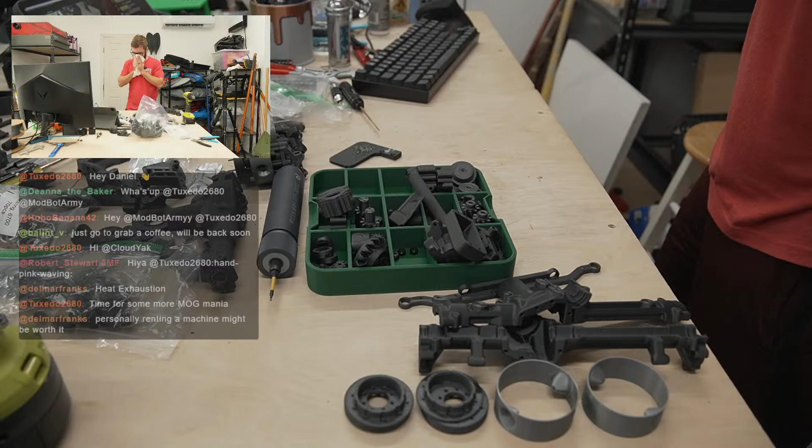I really wanted to rent a trencher, Delmar, but I don't think I had the space for it. It's not a huge run—I haven't measured it because it kind of curves really weird, but between the shed and this concrete slab is like max 3 feet width, which might be enough, but I don't know. A pick would help if you want to do it by hand.

That's what my dad said, to get a pick. I do need to run some sprinkler wire, which doesn't need to go as deep, but for the electrical work to the shed, I basically have to dig down 14 inches, for code, inside the metal conduit. The top of the conduit has to be 12 inches below grade. So most of it is somewhere between like 13 and 16 inches. I'm not consistently measuring, but it's just not fun.

Home Depot runs small trenchers. Yeah, well, in hindsight, I probably should have done that, but I'm so far, I'm like 80% done. I think I have a photo, I'll show you guys kind of what I've been doing. Gosh, and I'm sorry in advance, my allergies, there's just not much I can do. I took an allergy pill, I've been blowing my nose.

Yeah, so it's right up against, I don't know if we have autofocus on—yeah, we do. So it's right up against the house, and I've just been hitting all sorts of rock and concrete. It's just not fun. Thankfully it's not a massive distance. The shed is 10 feet, so the run is probably like 16, 20, maybe 20 to 25 feet. But it just sucks, it's just not fun at all.

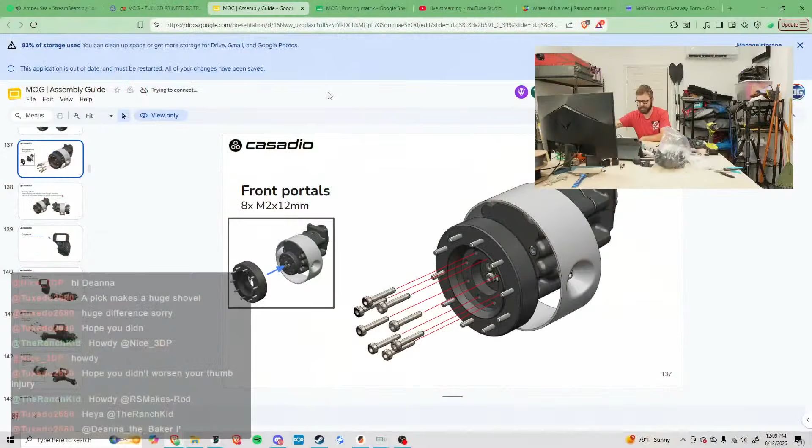Steve Builds left you to come to Portland? Yes, he ate your bagels? Oh I'm jealous, eclipses are really fun. Yeah, I saw your photo, it looks awesome. I'm jealous that he got to try your bagels.

Okay, so this is not the right piece. Yeah, I've organized everything so we've got that. I knew that Steve was gonna try to hit up Mandic to do a stream, but I didn't talk to Steve over the last probably day and a half. I checked in with him just to see how Phoenix was going, but I didn't realize. I texted him today and was like, hey dude, how did everything go, did you make it home?

He said he got to visit Mandic, and they streamed for like 5 hours yesterday. I just caught a little bit of the stream right now. I was watching, they installed I think it's a filter, for the Core 1, it said it was an LDO kit thing. So I guess it's not an official Prusa thing, maybe it's a community mod. I kind of skimmed through the stream.

For anyone joining in, sorry in advance, my allergies are just rocking me today. The fires have been crazy, so air quality is horrible, and then trenching has had all sorts of dirt. I'm changing the f-stop on my camera, it looks like I'm definitely overexposed. There we go, the color looks a little less like I'm in a photo booth. All right, blow my nose yet again.

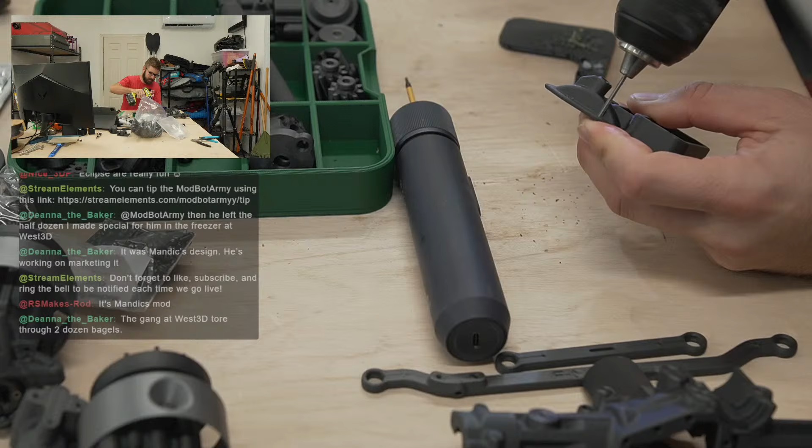Okay, I'm pretty sure I've gone through all of them at this point. Yeah, that's awesome.

Right, so we've got this guy, and it needs to go like this. Zoom out a little bit. And then this is going like this. Okay, it doesn't seem like it's causing any binding issues.

And we need M2x8s, lots and lots of M2x8s. M210s, M212s, M2x8s. We need 8 of them. 2, 3, 4, 5, 6, 7.

So we mentioned last week that Steve and I are starting the Antithesis Aether build, that's how you say it. I think our original plan was maybe to start it not next Wednesday, but like the next Sunday, so not this Sunday, but the following one. But I'm not sure if that is going to happen. We are waiting for some parts, basically waiting for some parts from PCBWay, and then I am waiting on a few other pieces. So I'm just not sure if they are going to be here in time. I haven't even talked to Steve really about it, so I don't know, Steve will probably pop in chat and I'll tell him. I know Steve's got some traveling too, so we'll see. We're definitely doing the build for sure, I just don't know what the starting date's going to be yet, based off of Steve's availability and then when we actually get the rest of the pieces we need in.

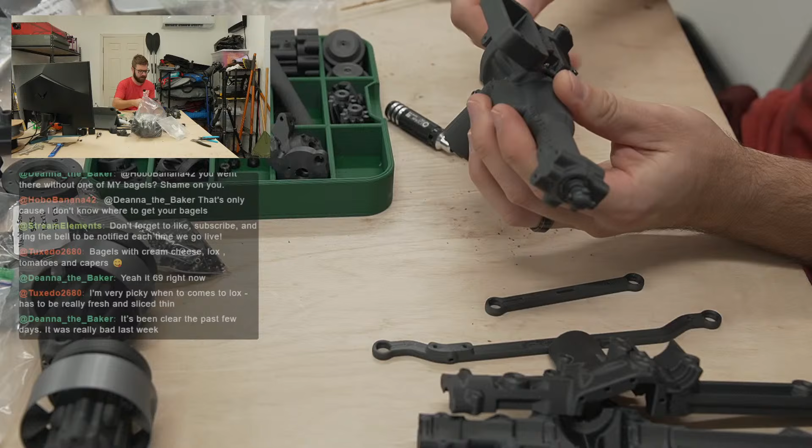Nothing is binding, we're still spinning freely, so not too smoky.

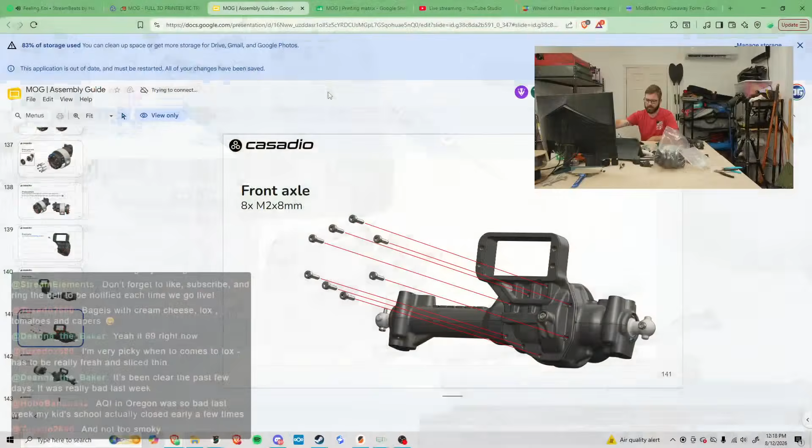AQI in Oregon was so bad last week, my kids' schools were actually closed. What did it get up to? We've been between 100 and 200 for weeks, and then we had a few days over 200, and a few days over 300, with a ranking for the 3rd worst air quality in the country for a day or two. But today, I looked and it shows 75. Yesterday Aaron took the kids out because Jack especially needed to go out, he's just got too much energy to be cooped up. So it definitely seems like it's progressing in a positive way.

Okay, apply some grease here. So we are connecting this side with, let's see, is it this one? That doesn't seem right, is it this one? Why is this? Oh, I'm holding it incorrectly, that's why. I think it is this guy. Yes.

Are we sure? This doesn't seem to... oh okay, here we go. Okay. So I think this guy, if I'm looking at this correctly, this seems like the correct orientation. But it does say we want to apply grease, looks like inside of this joint. So let's, oh, great.

Okay. I don't, where is it going? There we go. Okay, that feels like a lot of grease. Let me go ahead and sort of... where's our little flathead? There we go. Tiny little flathead from last week.

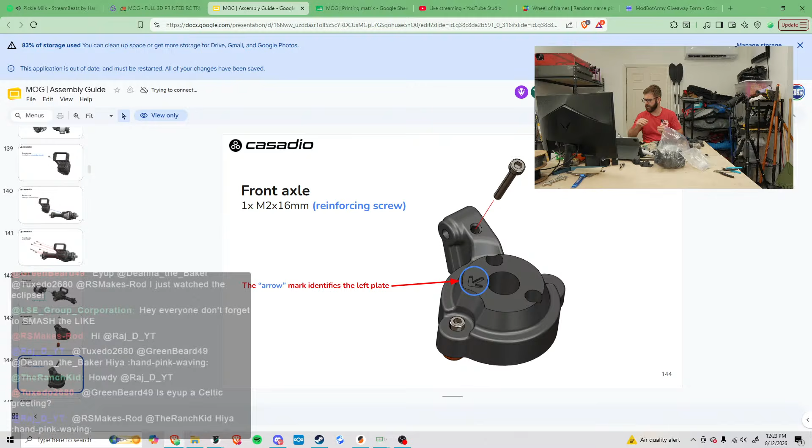Okay, grease this up. How is your dragster going, Delmar? Okay, so this is going at an angle.

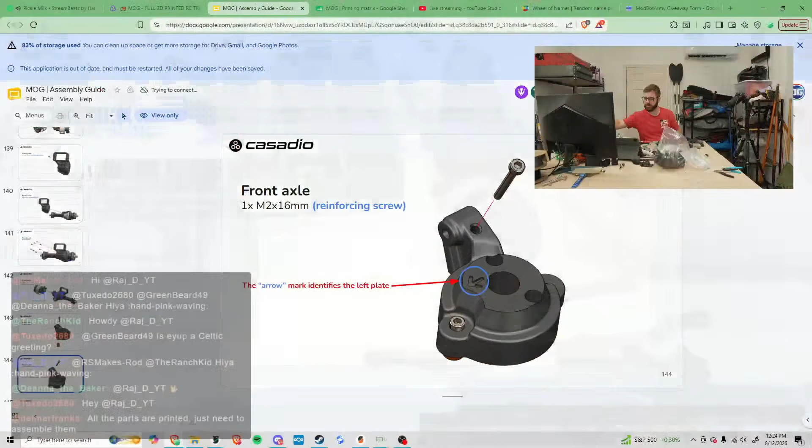Seems correct. Now this says to apply some grease here. Okay, grease in that hole.

I've got so much grease on the outside of this little packet, let me just put some on this flathead. Let's see if I can shove it down in here. Need a little bit more. Lots of heat sets, all the parts are printed, just need to assemble them nicely. Okay, that feels like it's probably plenty of grease.

Now it wants us to install this. Pretty tight. No, it's not too bad actually at all. You can definitely pivot, but it wants to pop out though. Okay.

Probably need to drill. Yeah, I need to drill through this actually. So let's take this out and drill. Not drill, but god.

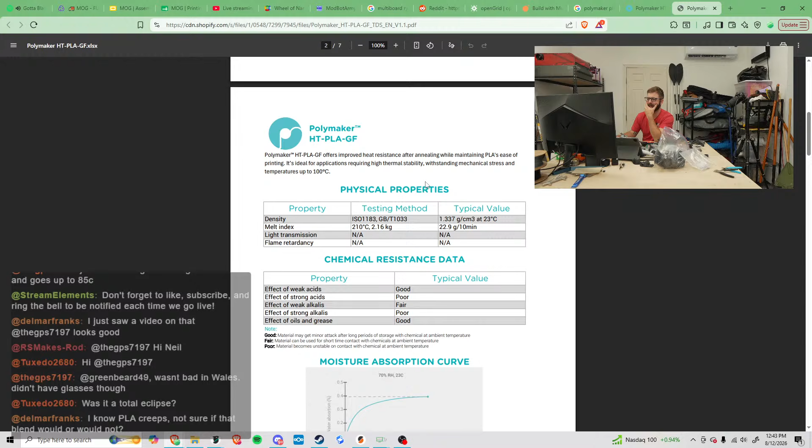But because it's PLA, I remember it withstands up to 150 C. Yeah, I think that's the Vicat softening temperature if I remember. I don't think that the actual... did they say, let's see - chemical, I don't care about, dimensional thermal properties. Yeah, so the Vicat softening temperature is 150 Celsius, but the HDT is only 60 Celsius.

So the Vicat softening temperature is probably not important at all to me, considering the load of the tool being held by those things. I don't think this material is going to work for what I need in that shed. I have concerns that during summertime when it's at its max heat, the weight of like a saw could potentially cause it to fall.

If I annealed it, then I'd have no concerns. Like, what is - hold on. 140 Fahrenheit is pretty dang hot though. It could be fine, and that's under 1.8 megapascals, and if we go to 0.45 megapascals, I don't know. I just don't know if I want to risk it.

The tools are just not super light, especially if I'm putting up - I've got one of their brad nailers, and a jigsaw, a couple, like a circular saw, a bunch of drills and stuff. I just don't know.

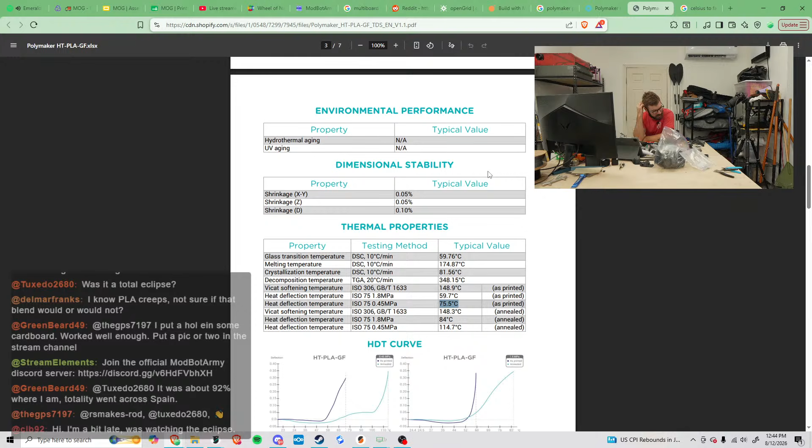I don't know, I really would like to because of the color. I really wish they made that green for their PETG, and I wonder what the closest would be if I go to - it's PET. Yeah, that green's not even close, that's just black. If I want that green, I have to do that. I just don't want to have to anneal every part, that seems rough.

Well, it's the color, LSE - I really want the color. Hey cib92, if I didn't just say that - was watching the Eclipse, no worries.

I don't have a ton of stuff to mount, but I want it to be as easy as I can make it. If you want simple, I've seen really good stuff about OpenGrid. It might be worth taking a look at the OpenGrid system.

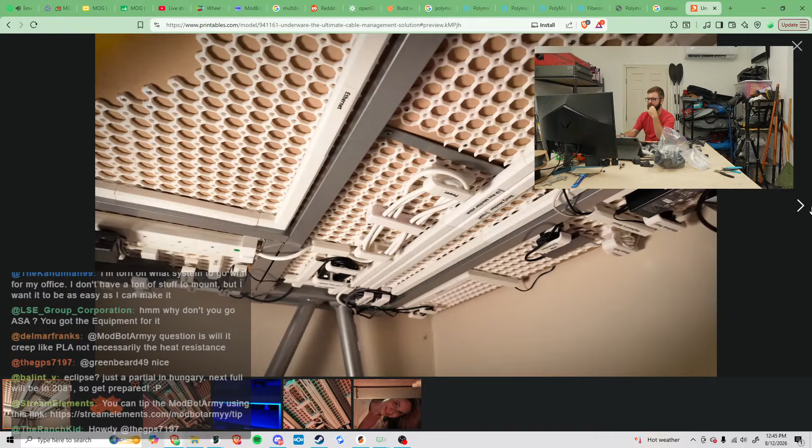I'm gonna try out OpenGrid for the under-desk cable management project. I'll probably do a full video on this, but this was initially - it is still compatible with multi-board, but V2, which I don't think - this is V1 - so V2, if I go, where is... we should have a V2 somewhere.

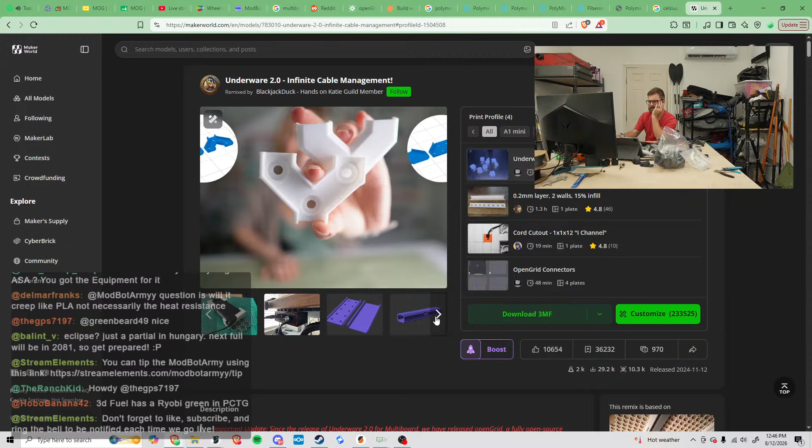Interesting, is it not hosted on Printables? Underware cable management V2? Oh, I guess she moved it. So V2 is - oh, they still have multi-board, so it works with both. It's interesting, there's not even photos.

Yeah, we released OpenGrid, a fully open source grid system. So I want to try - the different words are throwing me off, there's so many - but I want to try OpenGrid for under the desk and see how that goes. But I do think I'm going to do multi-board for the wall. So, question is, will it creep like PLA, not necessarily heat resistance?

What creep? You mean like a slow sag from the heat? ASA would be great for that.

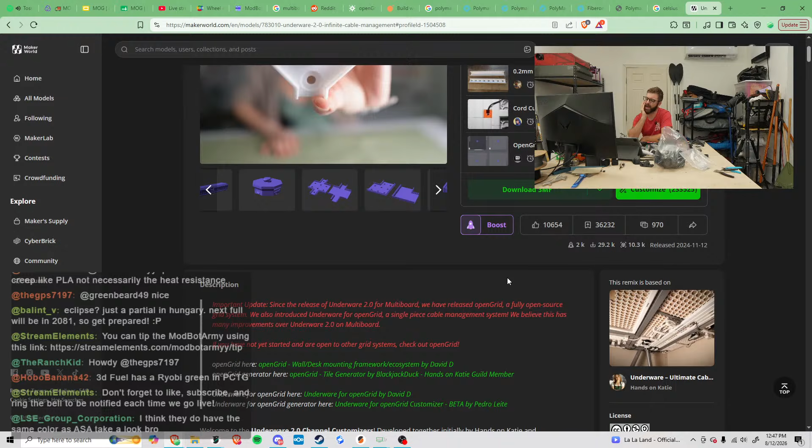I'll see if there was a color that matched what I want. It's literally just a color thing, and I don't have to do that color. I could absolutely go with something else, but the idea of ABS or ASA matching the tools just makes me happy. It's just a little detail that I think would look really nice, and make me look at it and be like, yeah. So I don't know, I really don't know.

3D Fuel has a Ryobi in PCTG. Interesting, I wonder if they'd want to do some sort of collab. I've reached out, kind of. I've been wanting to test out their filament, but they don't have a TDS, which kind of drives me crazy. At least I don't think they do. If I go to any of their PETGs or PCTGs and I scroll down...

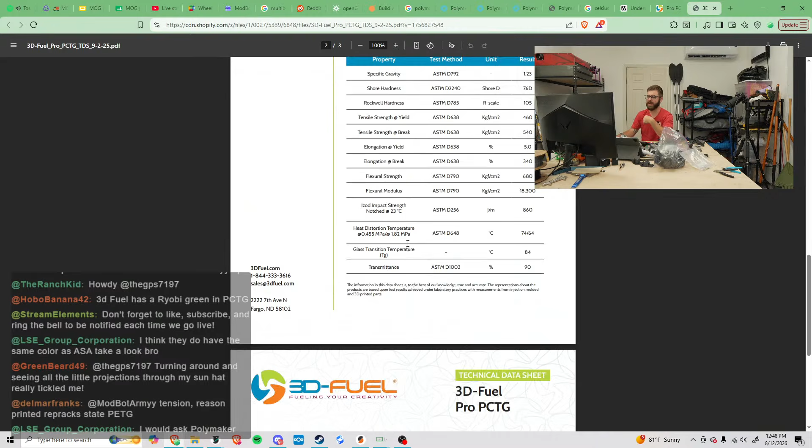No way, they finally got a TDS, dude. Okay, yeah, I'm gonna do a video on this stuff. I've been wanting to test this forever, but there hasn't been a TDS available because I don't have all the gear to test it myself. One of my goals this year is that by end of year I have a tensile tester. I really, really want a tensile tester.

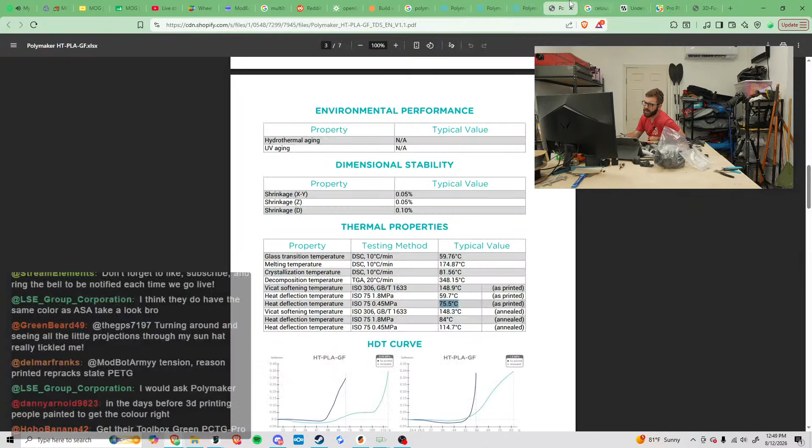Probably upstairs, so we got tensile, ASTM - I don't feel like that's what most of the other elongation, glass transition specs are. We don't have glass transition, but they do have heat distortion, and they've got both 0.45 and 1.82, so 64. Not too much higher than Polymaker's. What was that, 60 versus 64 for Celsius?

PETG on steroids, significantly enhanced performance. It boasts tremendous impact, toughness, and durability, superior chemical and UV resistance, greater clarity than PC. Yeah, I'm excited to play around with that stuff. Tension, reason, printed brackets, state PETG.

I would ask Polymaker, yeah, I definitely can. In the days before 3D printing, people painted to get the color right. I know, but then the coating can get scratched, and I don't know. There's other solutions, I'm not saying this is the only solution, but it's the solution that I ideally would like.

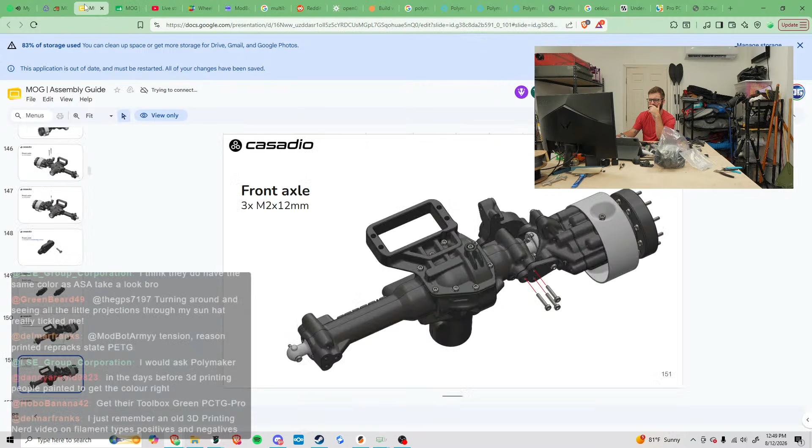Okay, let's do this. So I think we tightened these guys down already. Sorry, I got derailed there.

Okay, this is indeed pivoting. So I think with time it'll work in even more, but it is pivoting now. Make sure these are tight.

I will potentially do some of this UNIMOG build off stream just because of the hassle here, the extent of time this is going to take, and some of the things are sort of like... to do this again and again and again, they're pretty similar on the 6x6.

But yeah, I'd like to think that because they designed it in those toolbox colors, they had to have thought that people were going to be using them for tool hanging and stuff like that. So we'll see what they say.

The shed will be insulated, and the hottest it gets here is usually 105, maybe 110 at the peak. So I guess as long as I don't notice much sag - tension sag, you're calling it creep, tension creep - but maybe I just haven't used PLA in an application where it's really mattered that much.

I just remember an old 3D printing nerd video on filament types, positives and negatives, for the creep. Okay, so now we're installing the other half on this side.

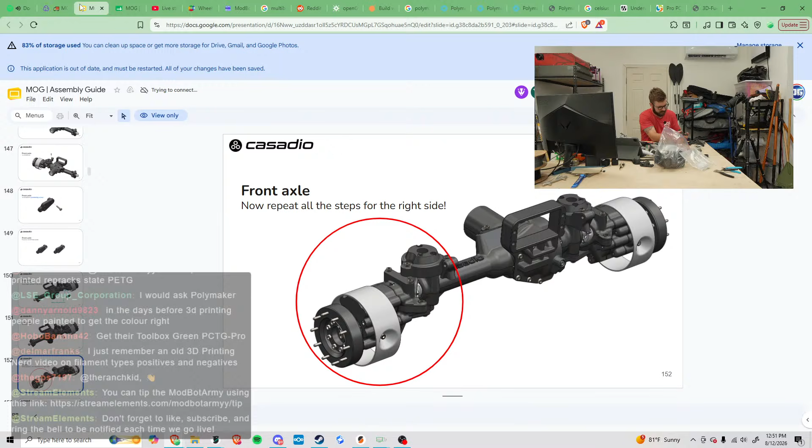So we are gonna flip this guy around. This is going, we're gonna need to add a little bit of... is this the right way? Yeah. We're gonna need to add some grease in this segment here. So let's get some grease, grease this up.

Hey, is that the frunk? Is the frunk... there's no frunk. No frunk. All right.

Is any? Ooh, that was... oh my god. The packet went from not wanting to spit out grease to just saying eject all grease. I'm going to probably take some of this out. Also, there's a little piece of... let's scrape this off here.

So it seems like HeartK has used or is using the multi-board wall organizer. But does anybody else here use any of the wall organizers? Just curious for feedback from anybody here.

I watched some videos and read quite a bit of Reddit posts that were sort of Reddit-y, where there was no exact answer. It was kind of just a debate that didn't really come to any formal conclusion. I'm feeling pretty set that I'm probably gonna do openGrid for Underware storage, that's definitive. But because of how many you're using, multi-board... Okay, how do you like it, Deanna? I know some of the trade-offs, like licensing isn't truly open source, it takes longer to print, and I think you have to use the paid version maybe to stack plates, but I'm sure someone's figured that out.

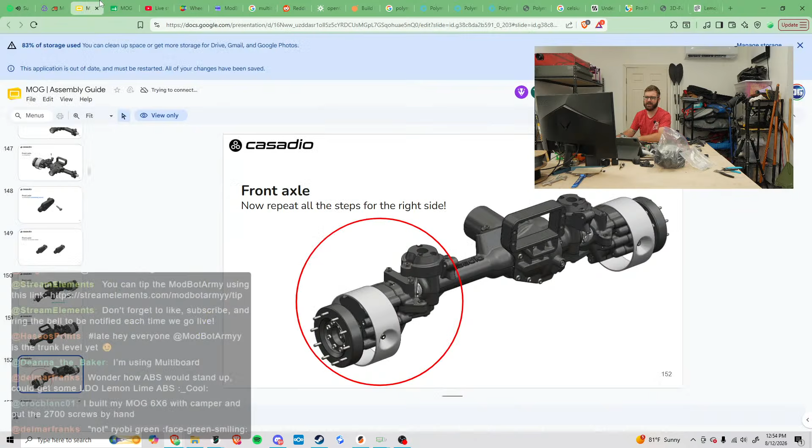So it's absolutely that. I built my MOG 6x6 with camper and put the 2700 screws in by hand. No, you didn't, Croc, no way. I don't see how you could do that without, oh my wrist. I'm already on the computer all day long, and my wrists sometimes get a pretty bad burning feeling in them, and I have to take it easy and use these wrist guards. There's no way I could build this thing.

There's no way I could build this thing without having an electric screwdriver. Okay, so we need another one of those little pieces I inserted in here, which I think is probably... yeah, there's one.

So you're a mad lad. It took 2 weeks. That's still not that slow, man. How come you decided to not use an electric screwdriver at all? I've got to know, it can't have been a cost thing considering the price of just the components for this. I'm just curious what was your deciding factor to say, nope, I'm just gonna take my time, and turn in 2,700 screws.

Okay, let's see if we can get this started. Come on, baby, there we go. Okay. Crazy, I can't believe you did that.

When can I catch you in the live stream on TT as well? What is that platform thing you put together? I don't know that I really want a dual stream, man. I haven't done it on Twitch or any other platform because I don't know, it's a very confusing system.

I've been custom designing stuff, also beefed up the board for medium weight stuff. Looks good and works fine when you get it worked out. Got it, is there any form of documentation on it or not really? I use multi-board in my shop, and a small wall for the shower works great.

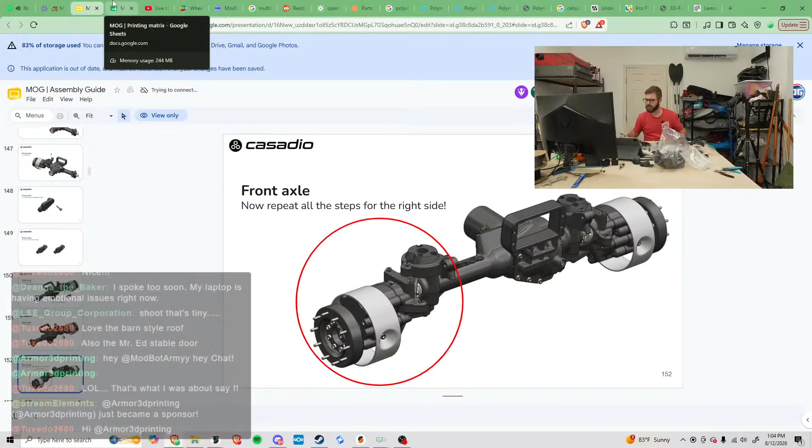All right, where are we? Here we go. So we need that. M2x8 is the last screw going in here.

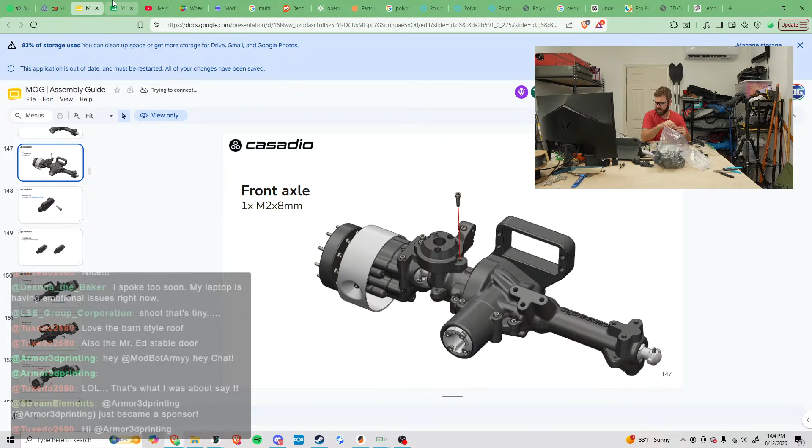M2x8. Week is going all right. I got to go in for a medical procedure tomorrow, so that's super fun. Luckily it's just short and a minor one. I've got a medical procedure on Monday of next week.

Oh, you guys knew about it. So I went to the hospital some months ago. I had this crazy sharp pain in my stomach, and I've had some stomach issues for a long time, but this one was more severe and wasn't going away, and I wanted to make sure it wasn't appendicitis, which is what I was concerned with, if I'm not mistaken.

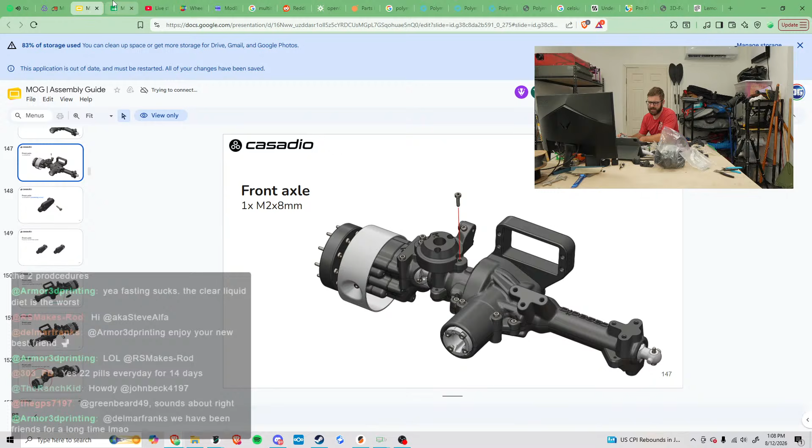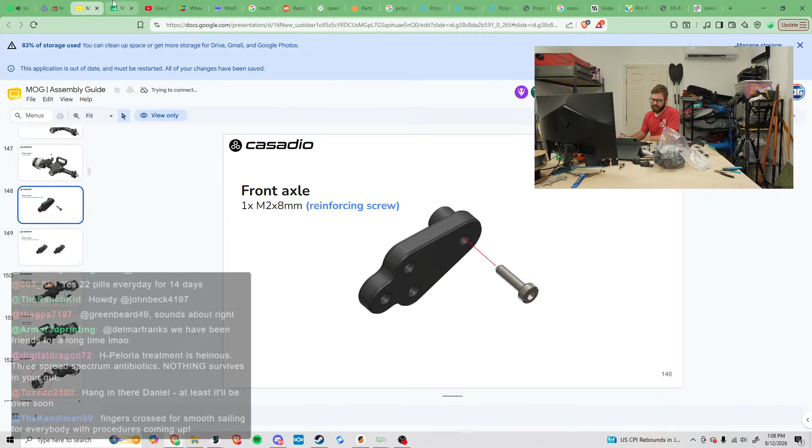That's crazy, yeah thanks Tuxedo. I'm looking forward to putting this in the rear view for a while. It's been kind of a lot of medical stuff this year, which I haven't had a whole lot of, really, leading up to this. So I guess it's my time, if you will. I guess that's one way to look at it.

But yeah, I'm just looking forward to it, because of the hospital visit and stuff like that, I've already hit my max deductible, or whatever it is, where the insurance we're paying for is actually covering some of what's happening.

I need to finally stop ignoring stuff and take advantage of the fact that we've already spent thousands this year. I drove myself and got a CAT scan done at the ER - that alone was a couple thousand dollars, which pretty closely hit my max deductible. So now insurance pays, I think, like 60%. It's not incredible, especially with how expensive things are, but it's enough that I should probably address some of my health things I've been ignoring.

Hopefully you don't need to do a double. I don't think I have to do a double, fingers crossed, I appreciate it. Good luck with your procedure, Armor. Hopefully they go in and everything's looking good. Wait, I don't remember if I reamed this guy out. Let's do it just to be certain, I don't want to break off a piece.

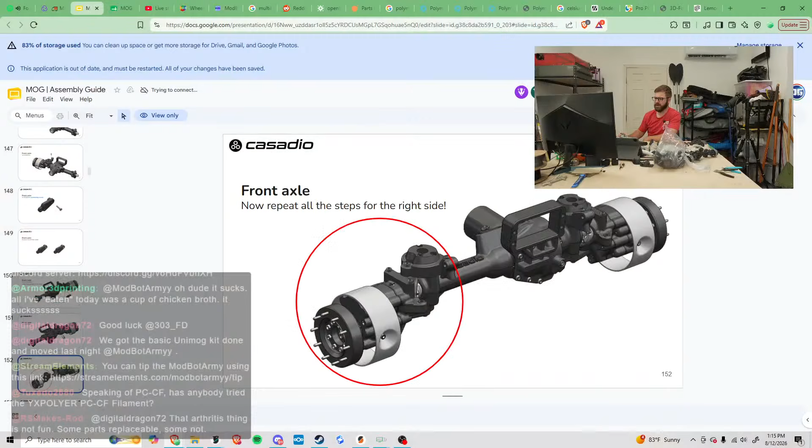Okay, so we got that. All right, now we're officially moving on. So let's do this. I printed these, and I don't know if I'm going to need to ream these parts out. I'm kind of hoping not, because I went with TPU for these.

So this is going in like this. The TPU printed okay. This was actually not on the Core One, it was on the A1 Mini because the Core One was churning out other parts. I'm pretty sure I dried it overnight, so it shouldn't be a moisture thing, but the pieces just don't look incredible.

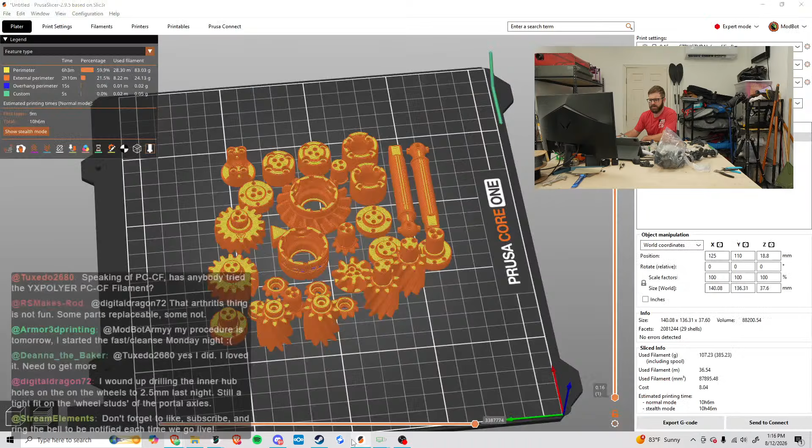Orientation-wise, I can't tell if it matters, so let's actually look at these parts in the slicer to see whether there's a direction that matters. These are the ball joints, part number 11, which I just finished printing. I'm just curious to see if the top and bottom are the same or if there's a larger opening. Those look the same to me, so I don't think it matters which direction we pop these guys in.

Okay, well that's a little... okay, the grease will increase the durability of the parts over time. Apply some grease. So I want a little bit of grease where we are popping these guys in.

Got it. My procedure is tomorrow. I started the fast cleanse Monday night. Oh my gosh, why is it more than 24 hours? I'm sorry, I assumed it was just the day before.

I wound up drilling the inner hub holes on the wheels last night. Still a tight fit on the wheel studs of the portal axles. Are you talking about these guys by chance, where these fit on? Because I had a hell of a time getting these on. I basically pushed them on, tried straight, but they would only go on if I worked this side, then that side, and this side, and this side.

Then I still couldn't fully get them seated. Once I installed the screws, when it bit into the plastic, it helped pull them down. I've been looking at them from the side and I can't tell if the back side is totally parallel to this. It looks like it is, but it was very difficult to get this on.

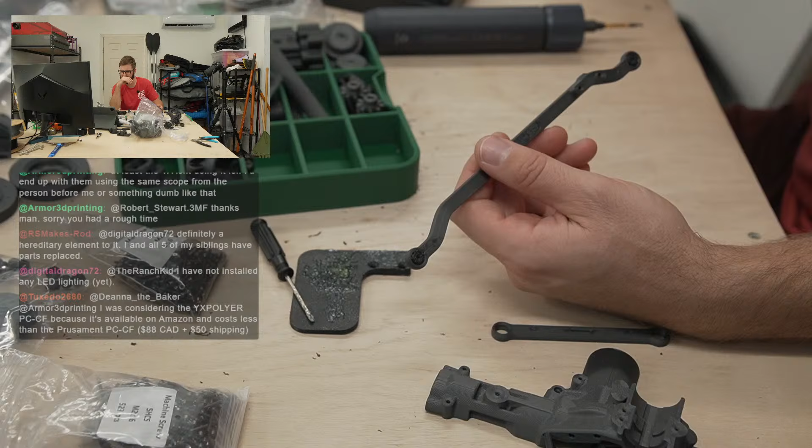Hey, what's up down under? Happy hump day. Well, even though for you, it's gotta be not hump day. For you, it's not hump day, but happy whatever, man. Happy hump day from here.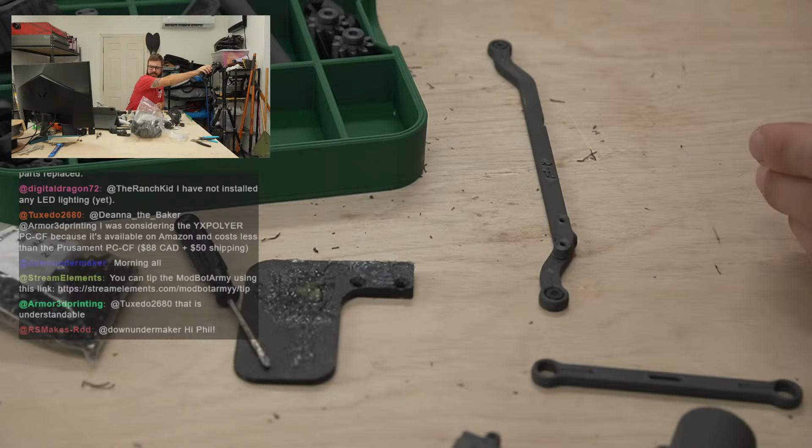Also, why is nobody yelling at me about the focus? Focus sucks. That's better.

Speaking of health stuff, how is... kids still trying to kill me? How's wifey doing? It was her foot or leg? I feel like at this point maybe she's out of the, was it a boot she had? It's been a bit. I know that it was a while that she was gonna get on for, but I can't remember how long it's been.

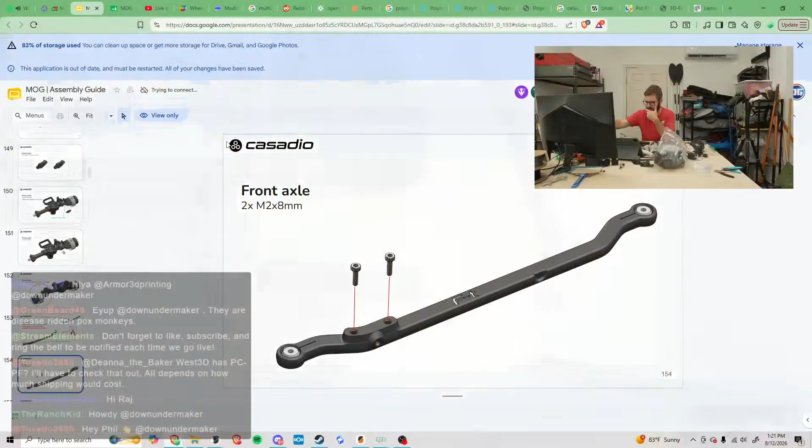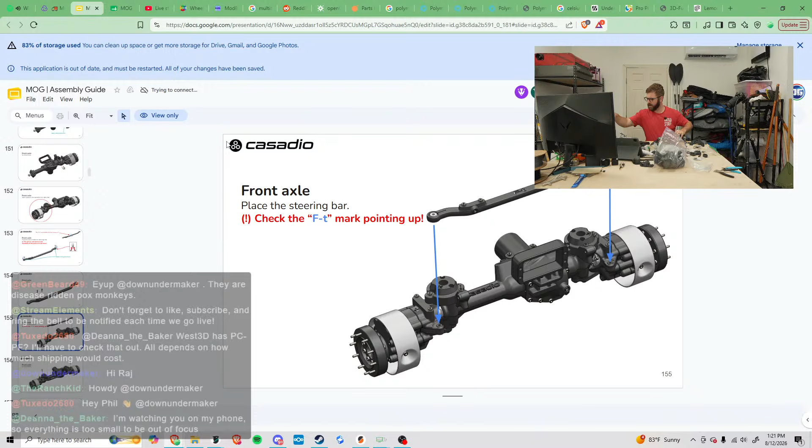Okay, those are in. Yep. Okay, what's next? Nice. So, place the steering bar. Okay. So, we are taking this guy, and we are... I'm gonna zoom way out.

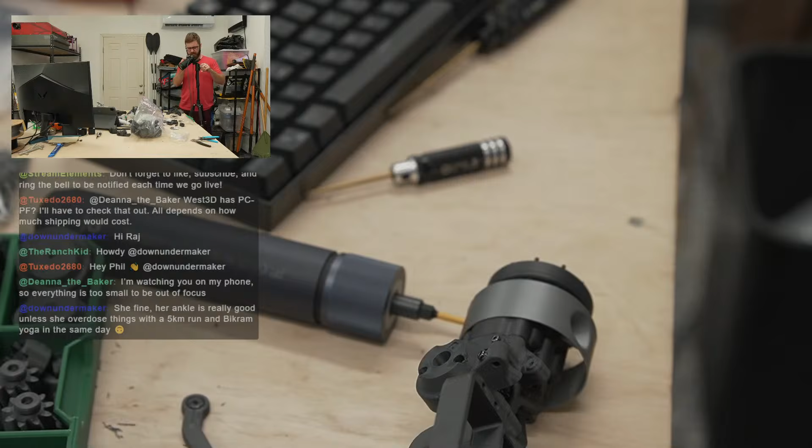She's fine, her ankle is really good unless she overdoes things with a 5 kilometer run. Yoga, gosh. What is she like? I mean, prior to that incident, was she really active? I'm glad to hear though that she's doing better. So I know that it was gnarly. I can't remember how long you initially said she was gonna need to wear the boot, or I think it was a boot, or I can't remember if you said it was a boot or it was a cast.

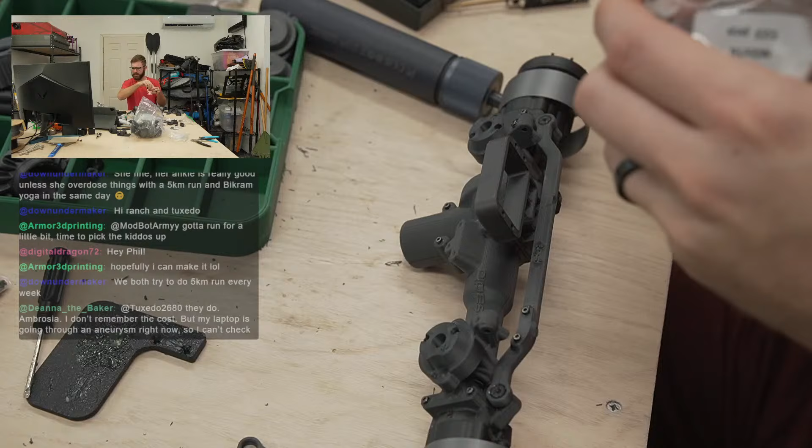Okay, so this is going like this. We don't need to do anything with that, and this is going to just stack like this, and then we are going to be feeding what through it? M2x16s. Two M2x16s. We both try to do a 5 kilometer run.

Wow, that's awesome. Gotta run for a little bit, time to pick up the kiddos. Hey man, no worries, thank you for stopping by. I will definitely let you know when the PC-CF shows up, and I am wishing you nothing but the best for your operation, and please do the same for me, man. With Sunday, or no, with Monday. Well, Sunday too, because Sunday is my day of fasting and purging. So I will take any well wishes.

Okay, I'm just trying to shove these guys through the TPU part. So since this is TPU, I'm assuming I am not going to want to fully compress it. So I don't exactly know what the strategy is here. I'm kind of thinking just sort of get the screw head maybe level with it, and then I'm not exactly sure what the call is here.

This is not going in. There we go. I'm definitely gonna hand tighten once I get close. All right, there, so the screw went through. Okay, screw went through. Yeah, I don't know exactly how tight I want these, especially because these are TPU. I don't see any sort of descriptor, so I'm going to just hand tighten these guys until the head is not allowing any up and down play.

Those prints look super clean, nice work. Hey, thanks man, I mean, I can't take credit, this is the core one. I pretty much use default settings minus the specific things for this build. So, okay, so that is...

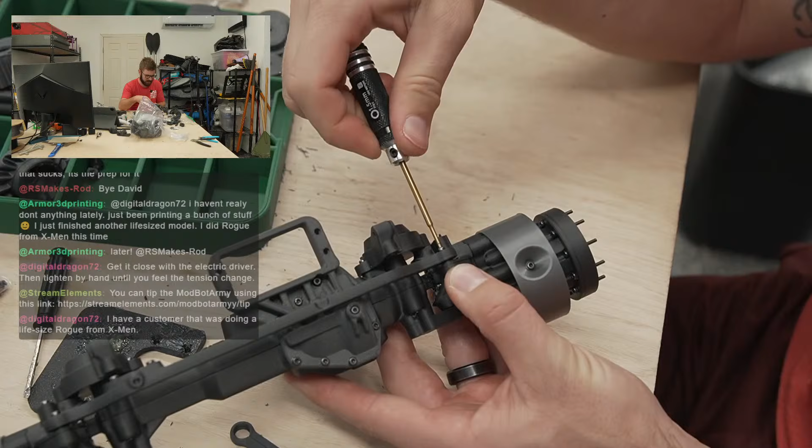Oh yeah, these need to be able to move up and down because of what they are, right? So, God, I don't know how tight to make these, like that. Does anyone have any, get it close with the electric driver and then tighten by hand until you feel the tension change. Okay, so yeah, I think that I'm gonna call that good enough. Just hope for the best. I don't want to compress them too much. I think I could always tighten them more, but if they go too tight right now, I could deform them, and I'd rather not do that. So, tightening. Okay, I'm feeling tension change. I think we'll leave it there. Sick.

Nice, so these can go left and right, and then pivot if needed. So, sick, I'm really pleased, very, very pleased with the way that turned out. Okay, yeah, we just did that. Now we need a servo. Cool, okay, servo assembly. Let's see, that's not servos. Servo. Okay.

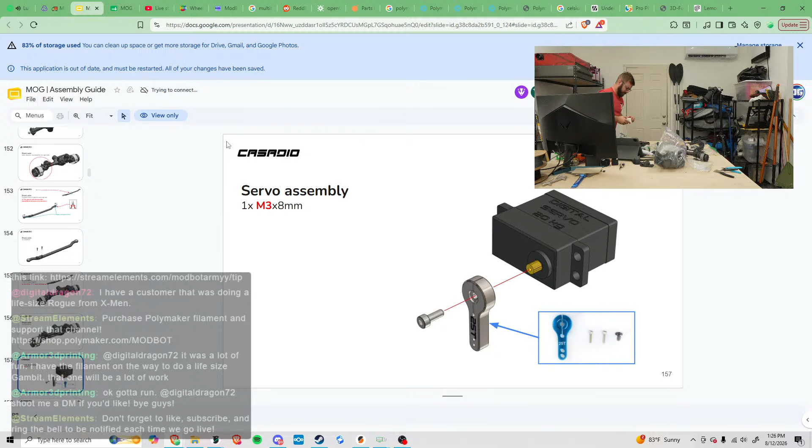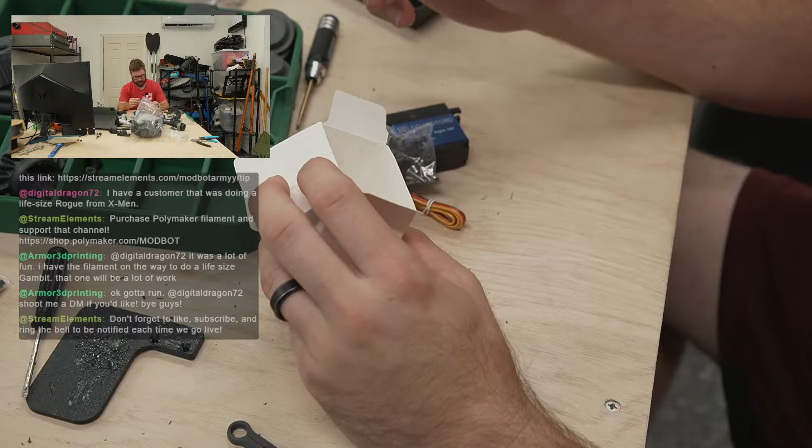So my question is for you all, because this is such a large build and I'm going to be taking a break at some point to stream with Steve, and also to do Monolith. Are you guys good with me doing some of this off stream? I'll try to do what I can on stream, but if it gets to the point where I want this done too, maybe I start doing some of this build off stream and pick up when there's a break. I don't know.

Okay, so this is the part we're using. It looks like it's CNC'd. Yes, this must be that part, I think.

Does it matter which direction it goes? I can't exactly tell. There's a lot of repeats.

I mean, I'm basically building like 3 of these guys as far as the segment I'm working on, so I'm okay with off stream. There's just so much there. Yeah, okay, that's what I'll probably do then.

Okay, so we need this, and it says an M3x8. Is this an M3x8? It sure looks like it, but I don't know for sure. Do I have a caliper out here? My calipers have all gone inside. Let's see if there's an M3x8 included with this build. Okay, so this is not an M3x8 then. This is definitely an M2, the thread is too small. M3x8s, here we go.

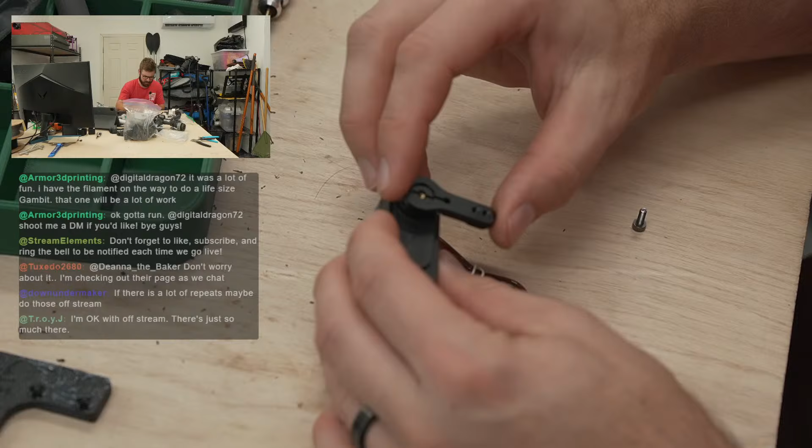Okay, so... sorry about the focus, it's a constant struggle. Is it bad to force this when it's off? I've used servos before, but they never seem to care. Well, this one doesn't seem like it really wants to move as easily. Okay, and this one I can't seem to line up the way I want it to, so I guess I will just leave it like that. This will go like this.

Where's my driver for these? I don't see a 2. There it is. Actually, this is not right, we need a 2.5. Seriously, I'm gonna have to grab my Allen keys. Unless this build came with... actually, here we go, build came with everything, didn't it? Yep, there we go.

All right, okay, so that's done. Now we're doing the other guy, 2 more of those TPU pieces.

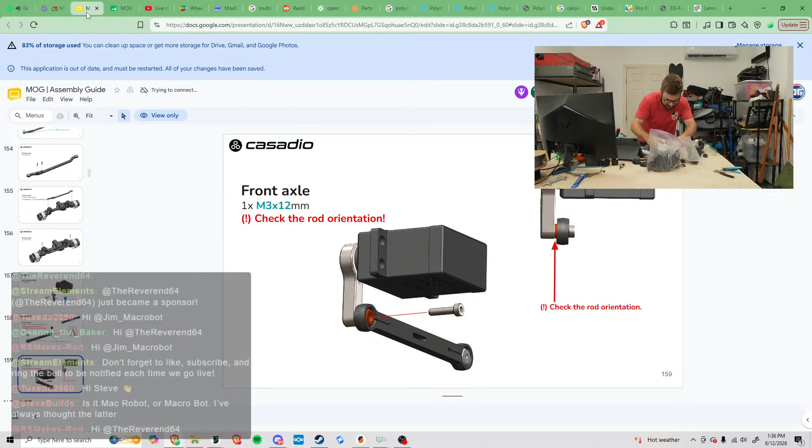Let's see if we've got M2 nuts. Those are way too big, M3x20s. So 3x12s must be out here somewhere. The set screw, M3x12s, cool.

All right, so let's get this screw out. Is it Mac Robot or Macro Bot? I've always thought the latter. Oh, I don't know, I like Mac Robot. Mac Robot makes sense too, and I do like Mac Robot.

I'm printing one of these currently. The frame is assembled, nice. What materials and what color scheme did you go with?

Okay, so this is going in here. This is going to be... I don't actually need that. What am I doing, this is not going into PCCF. This is going into metal, so I definitely don't need to have the grease on it. Okay, let's see if I can shove it. This part looks like it is mirrored, so I don't think directionally it matters, but can I get it through is the question.

That is tricky. Let me see if I can shove the reamer through. Interesting, and it is an M3x12 that needs to go through here. Tight, man, I don't... I wonder if I should ream it, if it would even do anything with an M3, because this is an M2 reamer that I've got in here. Maybe I can just shove something in here, since it's TPU, to help widen it a little bit. The M3 screw is pretty large though for this center hole.

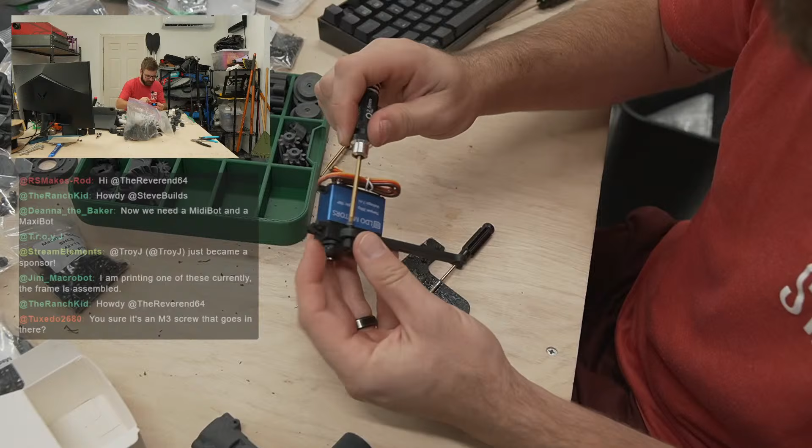Slightly at an angle, which I don't love. You sure it's M3? Yeah, it says M3, which is just weird. It's the same little TPU balls that we just did an M2 through, and the M2 is like perfect, but the M3 did not want to go through. So hopefully this is fine.

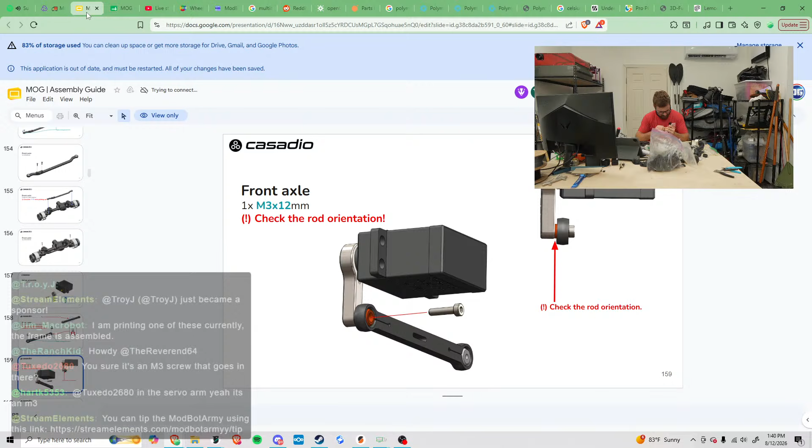Is that grease, or did I totally screw up the TPU part? I feel like the TPU part is pretty torn. I think I tore it up, man.

Wait, it's a separate little ball? Oh my god, you're right. You're right. Okay, yeah, thank you. Okay, so I screwed up. Thank you for calling that out. Yeah, the orange parts were part of a specific plate. That's right. So the ball, the TPU ball is going into the other side, which I'm not inserting an M3 through.

All right. Now let's pull this piece out. The TPU is like, why? Why me? Come on. Come on, there we go.

Okay, well, hopefully we have spares of those. If not, I mean, it's a very small print. I'm gonna check this guy out. But yeah, you're right, so I forgot. Anytime there's something orange, at least in this section, it means it came from a special plate of parts, which is gonna be here. And it is gonna be this rigid ball. Looks like this guy. Yeah.

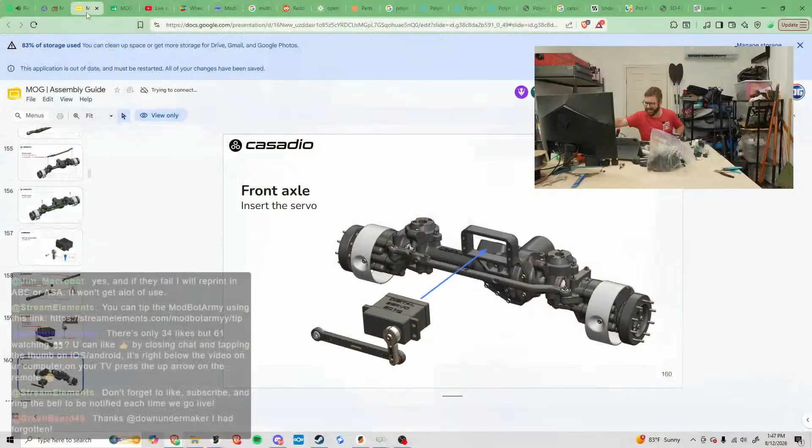Oh, I didn't mean to do that, but I'm not upset. All right, M312s, so 4 of them. Let's get those, they were somewhere not too far away. What did I do with you? I know I just used... oh, nope. M212s, M38s. There we go, M312s, 4 of them.

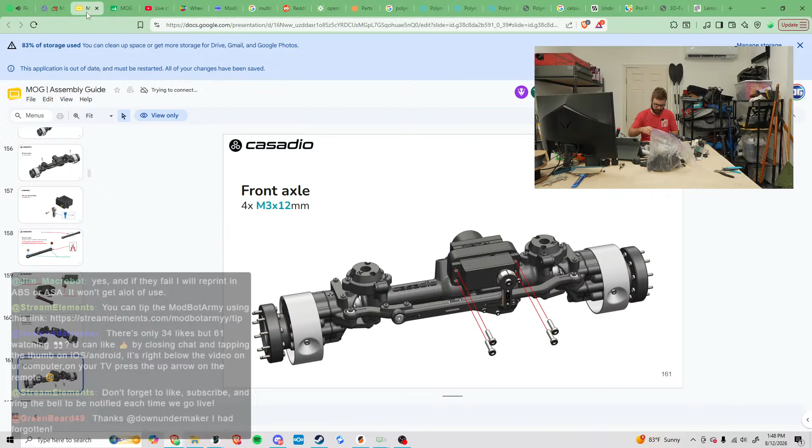Okay. I'll just hand tighten these. I don't.

Maybe not, it kind of sucks. It's pretty tight. Oh, you know what, I also should probably do some grease on these because we are going into PCCF again. Let's do that, a little grease.

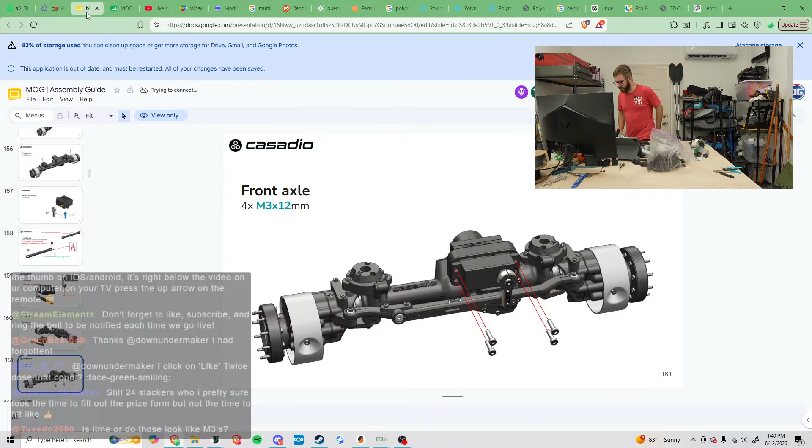I would love to have the right tool for this though. I just don't know if I do. Oh, no, I totally do. What am I saying? I bought a huge pack of all the sizes. Let's see. This looks like it's probably right. Let's see.

Yeah, your eyes do not deceive you. Yeah, I'm gonna use the Hoto. I can't believe, was it Croc earlier? It said that they did this entire build with the trailer with no automatic screwdriver. Just insanity, sheer madness. All right.

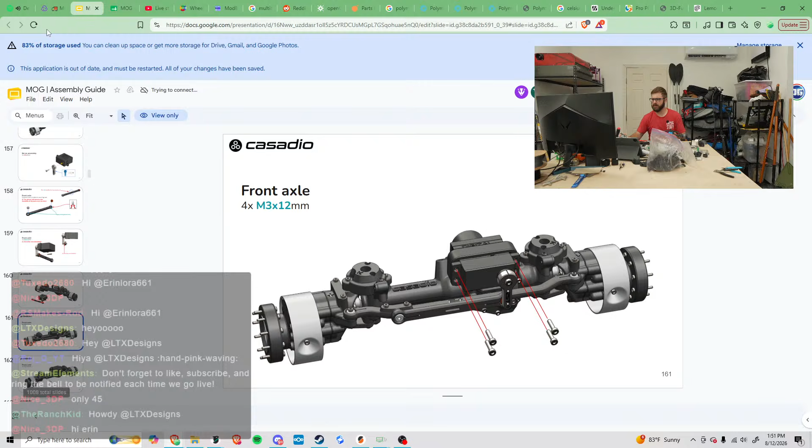Okay, we got those 4 screws in. Oop, and now the last one is an M216. So yeah, this is another one where I'm going to be careful to not overdo it. M216, here we go.

Swap that, swap these guys out. There we go. Okay.

It seemed like it lined right up. Okay, that screw passed through and out the back. Hopefully that's not a problem. Let's just hand tighten it the rest of the way.

Okay, hopefully that'll work. But yeah, screw popped out the back, which feels interesting. I mean, it probably won't cause an issue, but it just seems strange to me that the screw would pop out there, and they wouldn't have just used a slightly shorter screw. But I don't know.

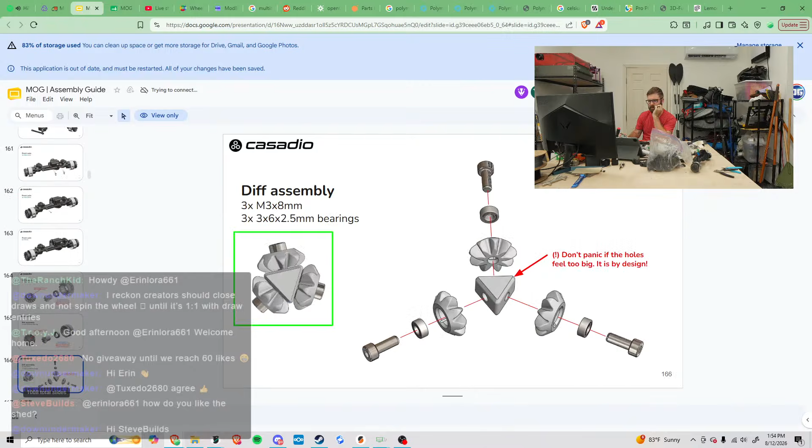Sick. All right, now we're basically doing the same thing that Steve and I did last week all over again, which means I'm probably going to do most of this off stream, is very likely what that means. I think we have to do this whole thing essentially 2 more times. So I'm gonna kind of power through this.

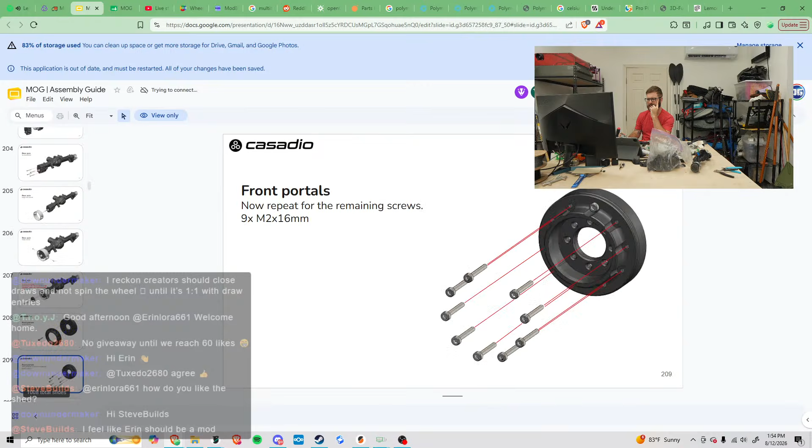I mean, it's slightly different, but it's really similar. Yeah, then the end pieces, then the same pieces, and those guys, and all the screws. Yeah, super similar. Okay, and then a third time. So yeah, I will probably try to do most of that section off stream because, like I said, the outer housing is slightly different. The gearing is slightly different, looks like in this guy, but it's largely the same thing that we've done.

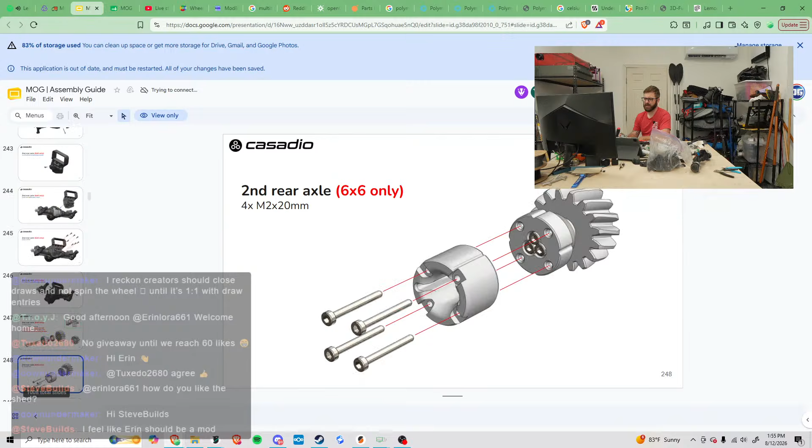Gosh, what was I gonna say? Yes Steve, I meant to reach out to you about things. So as you know, we got the Big Tree Tech stuff in for our build. I haven't heard anything from PCBWay, so I need to reach out. I'll try to float them an email tonight.

I did get a hold of Dan from Antithesis and got him the shipping and the small fee for the power supply and the spring steel, and he said he'd ship it out Friday. Based on that, and the fact that we need to print parts, I'm curious whether we'll be able to start next Sunday or the following Sunday. We'll touch base, but I just want to let you know I haven't heard anything from PCBWay yet, so hopefully it's shipping soon.

I didn't like how the stock kit controlled the rear steering, so I wrote a sketch for my ESP32. Now I can use a PS5 controller - left stick for the front steer, right stick for the rear steer. Nice.

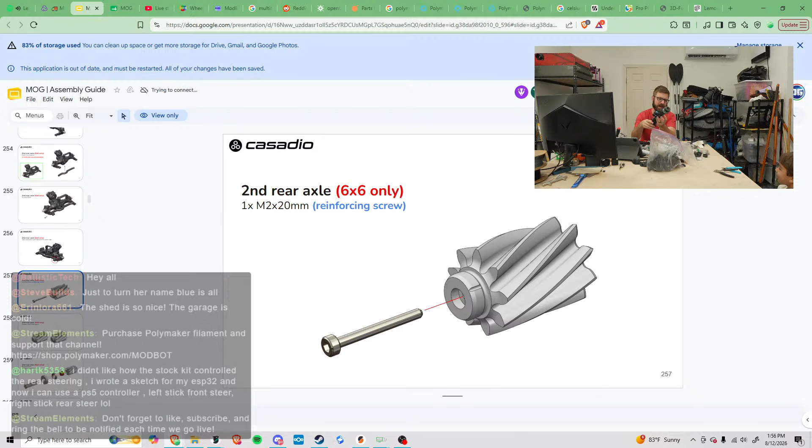Check this out, this is a wheel, right? It'll be a wheel, I've still got to do a lot more. Yeah, you saw me building it on the TV. Look at this right here - this will turn with the remote, and this will turn your wheels. Look at that. Pretty cool, right? Yeah, I've gotta build a couple more of these.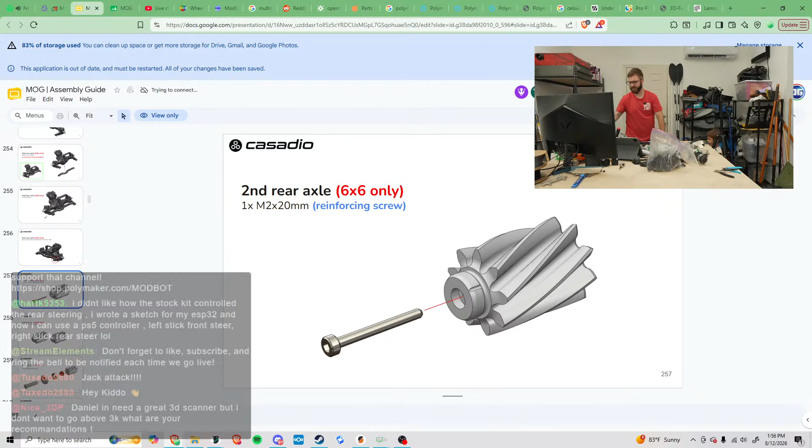I'm talking to chat, buddy. Come here, you want to say hi? They haven't seen you in like a month. I think this is a month, basically. Lisa's gonna be sad she's not here - she's her aunt, I think you said her aunt or something like that. Say hi everybody.

That is grease, do not get that on your hands - Mommy will not be stoked. Neither will I, this is grease guys. This is because the parts, the screws - see all these screws? It's a lot of screws, right? Yeah, and it's really difficult to get them in because it's got carbon fiber in it, and the grease helps it slide and not get as hot.

Yeah, they say hi, Jack attack. They said the star of the show is here. Are you the star of the show? No. No? Who's the star? Oh no, you don't know who the star is? No. Were you excited to see Steve streaming with me last week?

Yeah, those are tools for my screwdriver, buddy. Look, so that way Daddy doesn't have to use his hand. Look at that - pretty cool, right? All right, let's see.